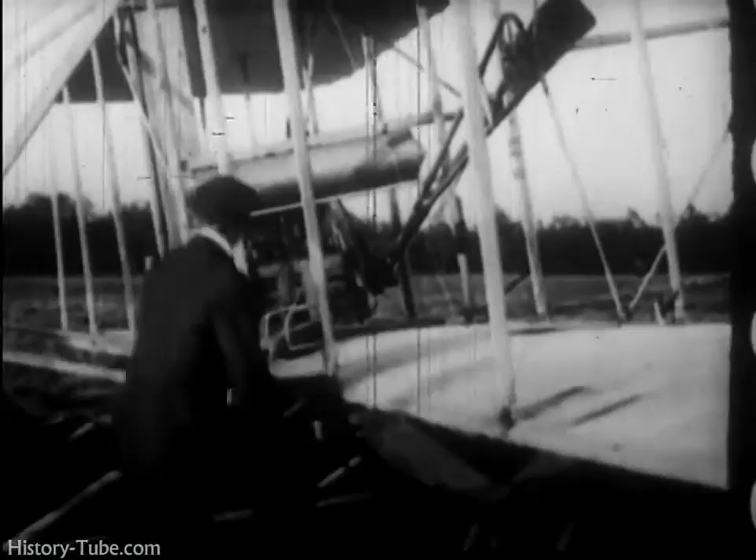time and space. But man is no longer earthbound, and Lockheed rides the airways with a thrust of bright propellers and the flash of gleaming wings. And behind this Lockheed lies aviation history. In 1903, on the plains of Kitty Hawk, North Carolina, this history began. In the granddaddy of all modern planes, the Wright brothers won immortality by sustaining flight in a heavier-than-air flying machine.

There is no fuss or ceremony, no cheering crowds. The motors sputter and catch, weights drop, the ship catapults off the ground into the air for the first flight on record. Since then, aviation history is written in a never-fading book of records. In 1928, a Lockheed Vega, the well-known Yankee Doodle, reaches New York from Los Angeles in 18 hours and 58 minutes. At the controls are Colonel Arthur Goebel and Harry Tucker.

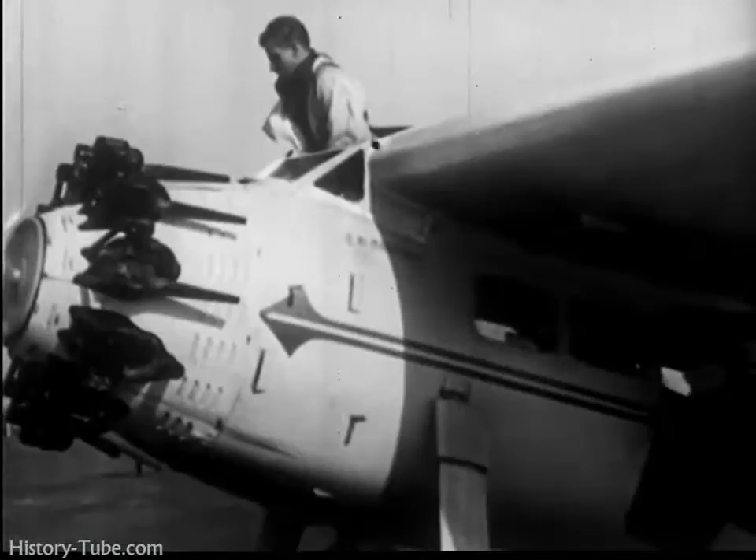In 1929, Captain Frank Hawks climbs aboard his Lockheed to set a new transcontinental mark. Good luck, Captain. New York is only 3,000 miles away. Off on his way to a new record, one of the many he is to establish in the years that follow.

Into the cockpit of his Lockheed Sirius climbs Colonel Charles Lindbergh. Mrs. Lindbergh is with him. Flying together, as always, they are heading from Washington, D.C., across the Bering Sea to Japan. A perfect landing after almost half the world has rolled by beneath their wings. Cheers and waving flags as Tokyo greets them.

That same year, 1931, Ruth Nichols lands her Lockheed Vega after establishing a new feminine altitude record of 28,743 feet. Nice going, Miss Nichols. 1933, a famous Lockheed, the Winnie Mae, carrying a famous flyer, comes home from a solo flight around the world. What an achievement for Wiley Post. First man to fly around the world alone, and first to fly around the world twice, both times in a Lockheed.

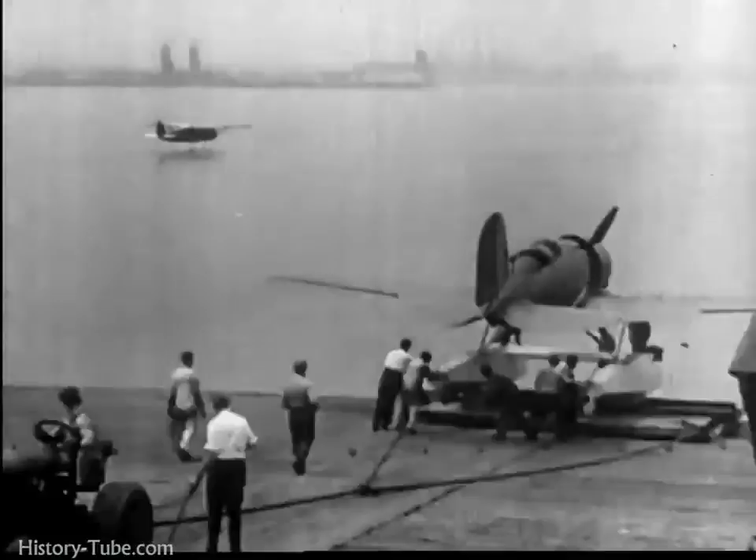Colonel and Mrs. Lindbergh are starting on another and perhaps their greatest journey. A 29,000-mile survey flight from New York to Labrador, Greenland, Iceland, Europe, the Azores, Africa, Brazil, and return to New York.

1934 finds Sir Charles Kingsford Smith, together with Captain P.G. Taylor, completing a 7,000-mile trip from Australia to Oakland, California. It is the first crossing of the Pacific from west to east, and Sir Charles, in his Lockheed Altair, the Lady Southern Cross, has made it in less than 55 hours. This great flyer and great plane certainly deserve congratulations.

In 1935, Amelia Earhart flies her Lockheed from Honolulu to Oakland. She is the first woman to make a solo flight over the Pacific, covering the distance in 18 hours, 16 minutes. The crowd hails her for an outstanding performance.

1938, Howard Hughes hurries to his plane for the start of his race around the world. 3 days, 19 hours, and 9 minutes later, his Lockheed brings him back to New York and a new record. In less than 4 days, he saw 5 sunrises, and the plane actually beat the revolution of the Earth on its axis. Records and more records. And these are just part of a long list.

But exciting as they are, they mean nothing to the true goal of aviation unless the experience gained is applied to further the speed, safety, and all-round performance of air transportation. And with the cooperation of the pilots who made these famous flights, Lockheed has been able to achieve that performance and create new standards of efficiency.

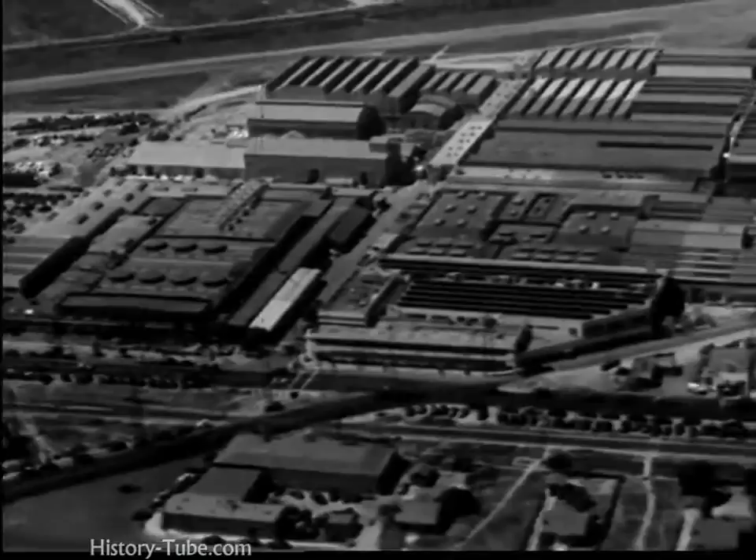Worldwide coverage, but it has not been accomplished in a day. It is the result of a smooth-running combination of men and machines. In that combination lies the story of Lockheed itself. It is a success story, modern, exciting, typically American. The Lockheed Aircraft Corporation plant, Burbank, California, in 1926. And today, the same company, the same location, but quite definitely not the same plant.

As recently as 1932, sales aggregated the overwhelming total of $23,298.03. In 1940, actual deliveries amounted to more than $42 million, and conservative estimates indicate that in 1941, this figure will be more than doubled. And to the men of Lockheed belongs a large share of the credit, to their skill and to their loyalty. They are a cross-section of typical American workmen: drillers, riveters, tool makers, die casters, machinists, and technicians.

In 1931, there were only 300 of them. 1941, over 35,000. Every man who checks in, from office boy on up, has taken and passed exhaustive tests covering intelligence, temperament, and special aptitude to prove his individual ability. 35,000 American workmen, the right men for the right jobs to build the best planes.

This is not a trick shot made with mirrors. It is the drafting room of the engineering department, where every new Lockheed has its beginning. A beginning conceived with the purpose of supplying the answer to definite needs of the aviation industry. To attain this goal, over 850 engineers make over 5,000 drawing plans, devoting a total of over 200,000 work hours to their mission of creating one new design.

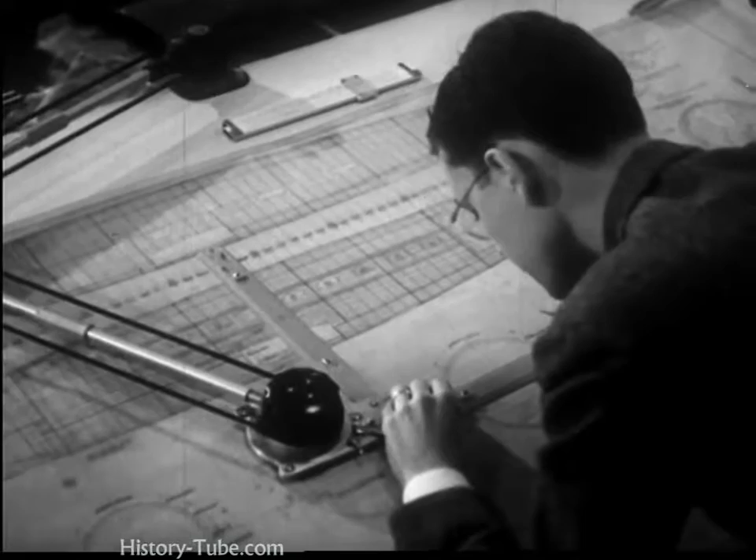The component parts of a modern airplane's wing, fuselage, and tail surface are almost countless in number, yet every single one of them must be engineered. Even the most minute part receives the greatest attention. Four separate drawings are made showing detail from four different angles. Although the part is no larger than a silver dollar, it will have to go a great deal further.

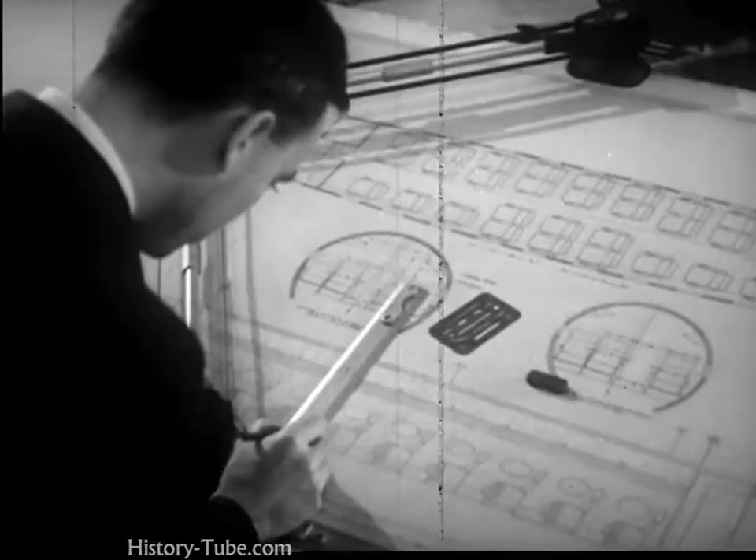The interior of a plane is one feature of design seldom associated in one's mind as coming under the supervision of the engineer. Yet one of his most important jobs is to provide utter comfort for passengers traveling through the air at high speeds. The Lodestar's cabin has been designed for this comfort. Inside, the sound of powerful motors is reduced to a pleasant hum by scientific soundproofing and vibration control.

Restful chairs, ample space, and headroom are results of thoughtful planning, and all Lockheeds are especially adaptable to the requirements of private owners. For businessmen to whom time means money, the Lodestar is convertible into a convenient and dependable office in the sky. The compact 12 becomes a comfortable lounge for attending important events anywhere at any time.

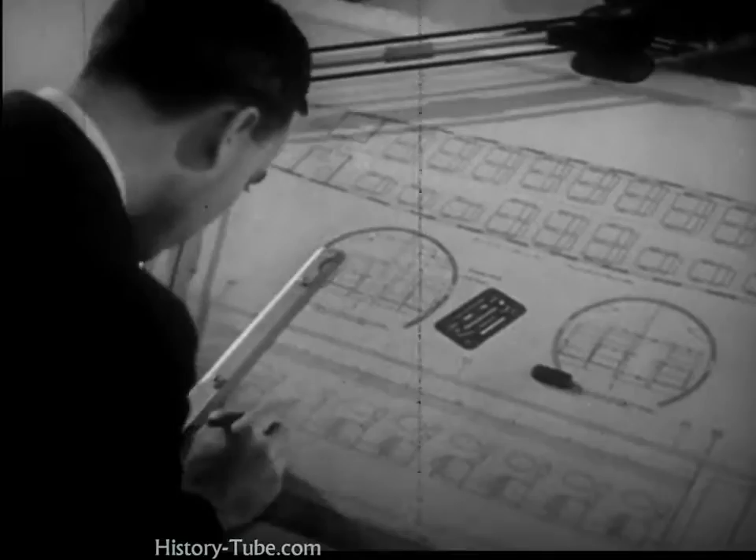The cabin of Lockheed's new four-motor transport, the Excalibur, will look very much like this. Although the plane is still under construction, the engineers have built an exact replica, known as a mock-up, out of wood. In this way, every possible detail of passenger comfort can be effectively predetermined and applied. But the ideas and plans that this man and the hundreds like him put into execution are not only those of Lockheed's chief engineers, but those of the entire flying world.

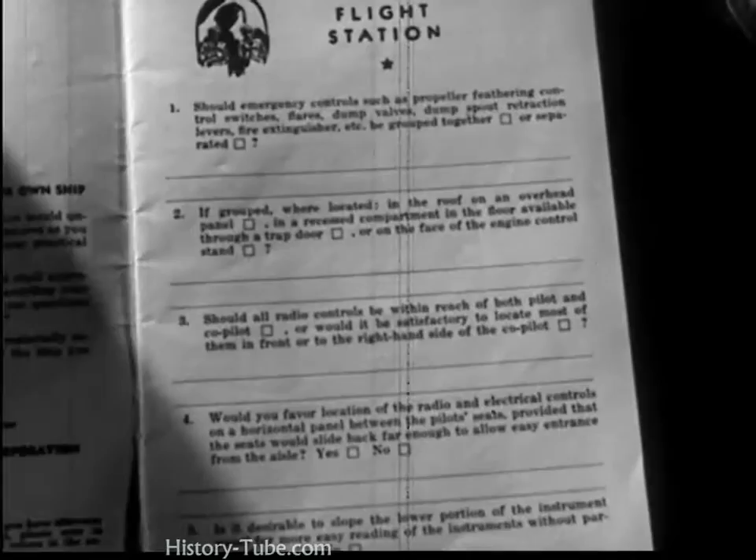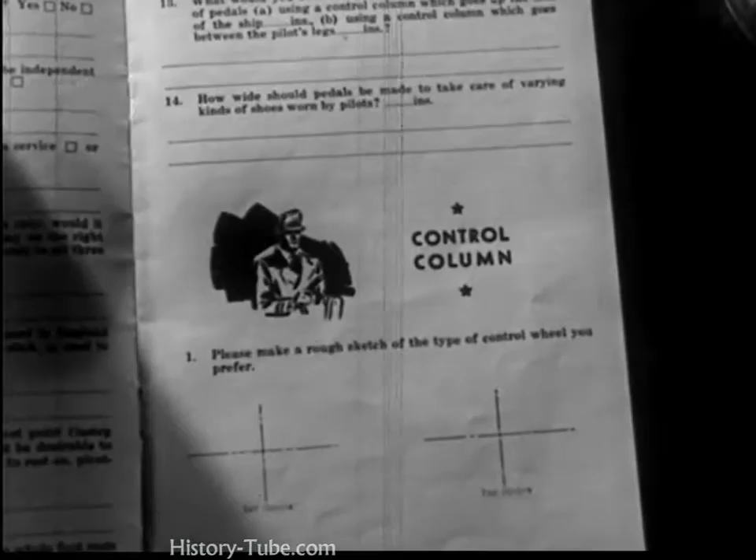For the Market Research Division maintains close contact with the operative branch of the industry. The staff compiles lists of important features relating to a plane's design. These findings are set up in the form of questionnaires. If you were to build your own ship, on the flight station, where would you locate emergency controls? On the engine control stand, where would you put the levers? And the rudder pedals?

These comprehensive questionnaires are sent to airline executives, pilots, transport officials in every corner of the world. To Trans-Canada Airlines, R.C. McLeod in South Africa, Tri-American Aviation, Buenos Aires. The list is almost endless, but to mention a few more, American Airlines, Lieutenant Thatch, VP-5 Squadron Canal Zone, and British Airways. The replies to these pamphlets are carefully sorted, for they represent knowledge gained under actual flight conditions.

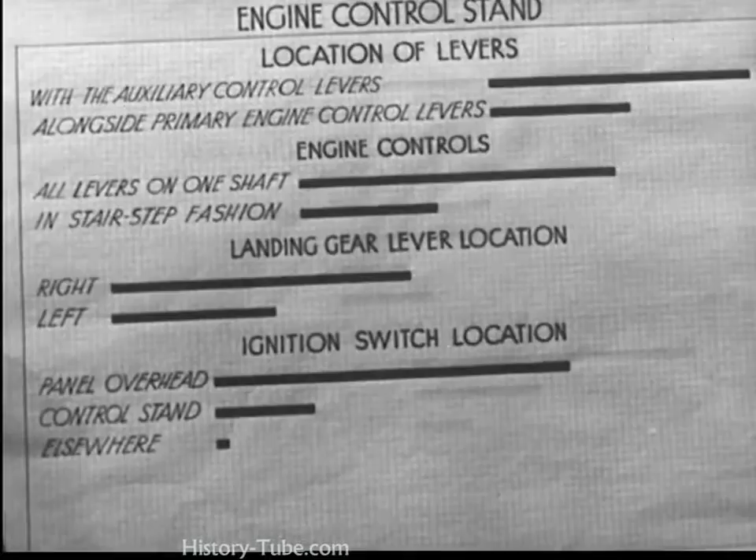Detailed graphs and charts are compiled by competent statisticians. No suggestion is too small. Every answer to every question is checked and noted. These findings are recorded in another pamphlet. You told us this is the way you would do it. On flight station, on engine control stand. And on rudder pedals, we asked, are brake toe pedals desirable? 93% said yes, 7% no.

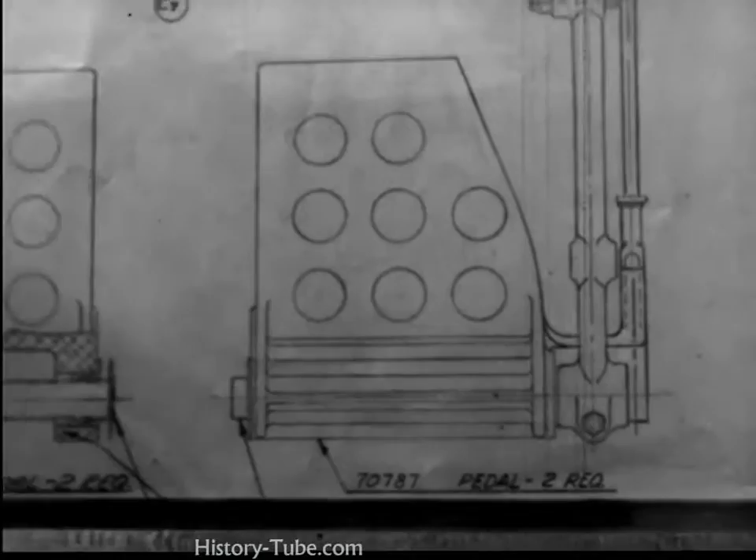That verdict is submitted by men whose combined opinions represent the experience of over 16 million hours of flying. These practical viewpoints, as gathered by market research, are submitted to the engineers. They combine these ideas together with their own creative ability in the conception and building of every new Lockheed plane. That's how Lockheed designs airplanes to suit the men who know airplanes best: operators, pilots, and regular airline passengers.

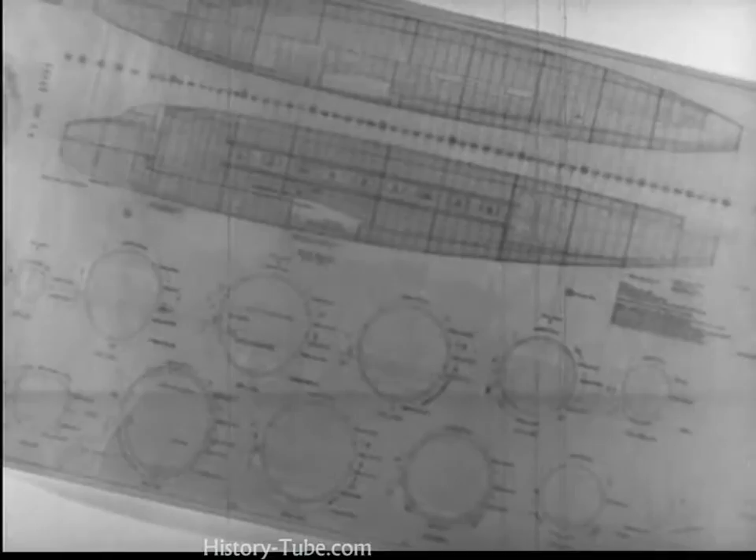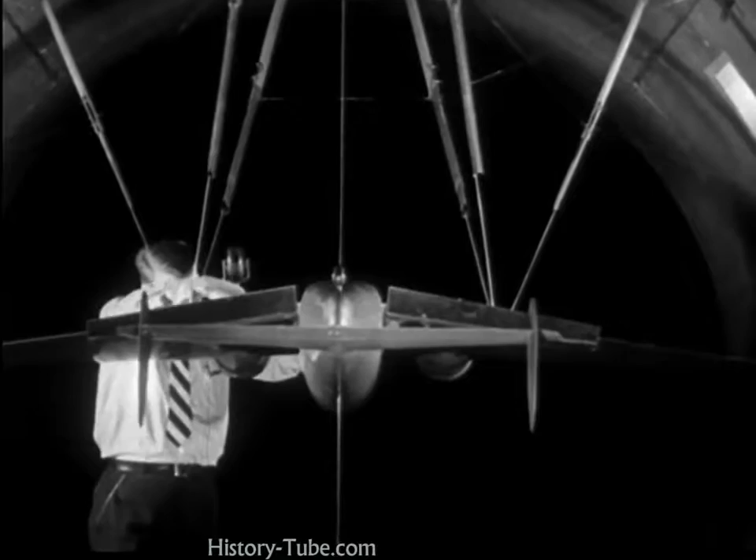And the first form a new plane takes is on paper. From these drawings and thousands like them, an exact scale model known as a wind tunnel model is made and is connected to instruments which determine its flight characteristics. The model is hand-carved, accurate to the fraction of an inch, weighs over 500 pounds, and costs more than $5,000 to build.

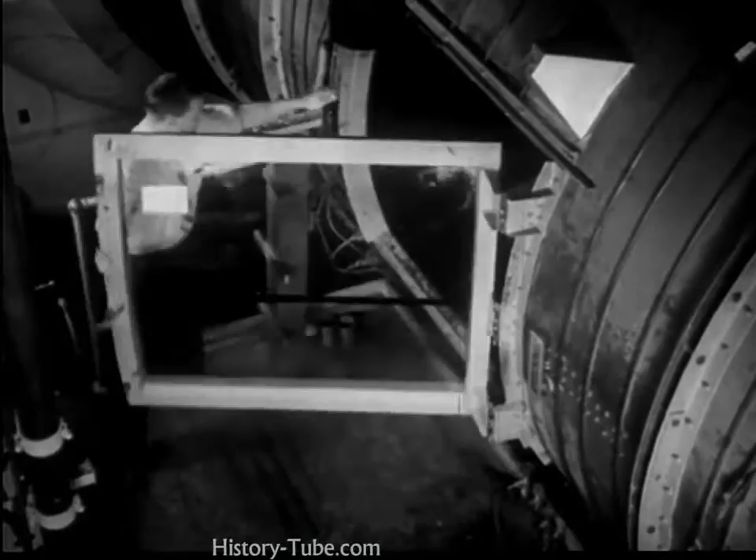The door is closed, the wind tunnel sealed. A flip of a switch and the wind propeller whips up to speed. The model is exposed to a far higher velocity than this 90-mile-an-hour wind. The small wind tunnel model is actually subjected to and withstands a much greater force.

From an idea to an actuality, from theory to fact, from a model to a completed Lockheed, the plane has been built. More than that, into it has been built the strength, ruggedness, and durability necessary for its safety and high-speed performance. But not so long ago, this shining plane was only a small part of a trainload of metal addressed to Lockheed.

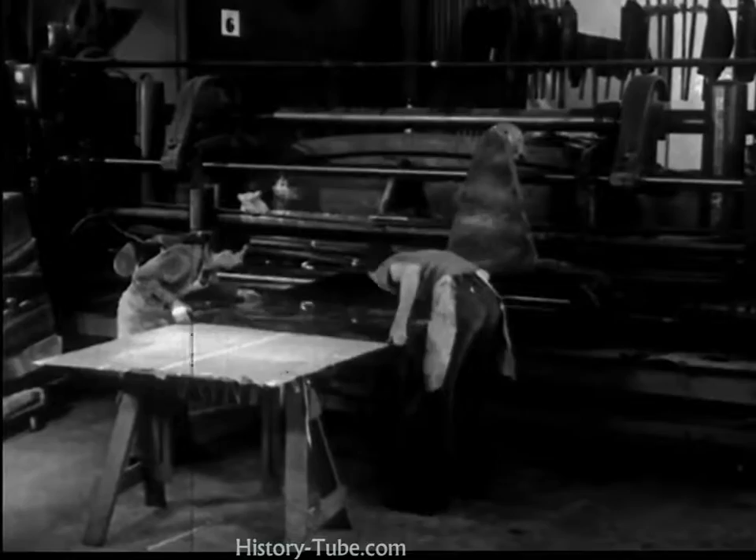For the metal inside these wooden frames is the stuff that planes are made of. Hard and strong, it must be fabricated by men and machines into the parts that make airliners. Giant shears act as huge mechanical scissors. Metal sheets are slipped into place. The sharp blade strikes and cuts through them as if they were cloth.

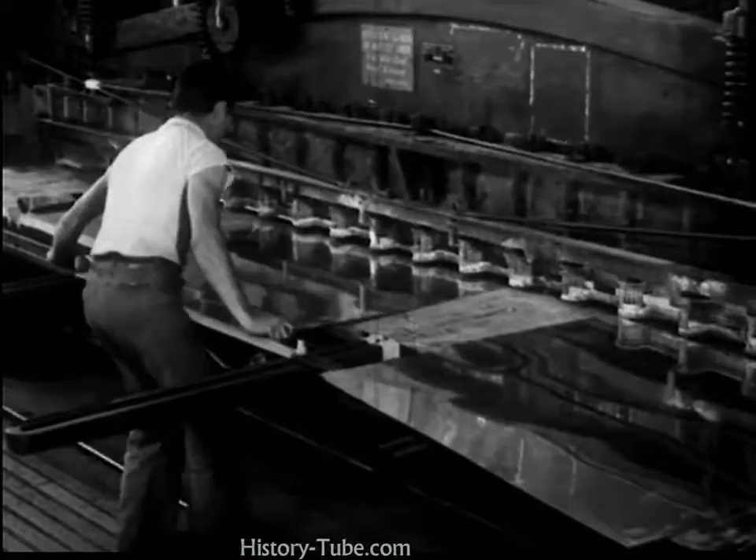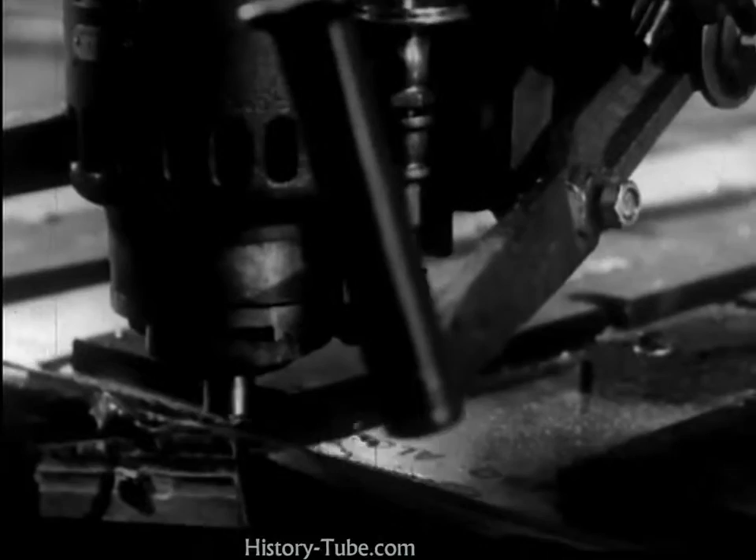The high-frequency router, a dental patient's nightmare, turns 15,000 revolutions a minute and cuts layers of metal into their first rough shape. The bit turns so fast that it must be cooled by a constant stream of oil.

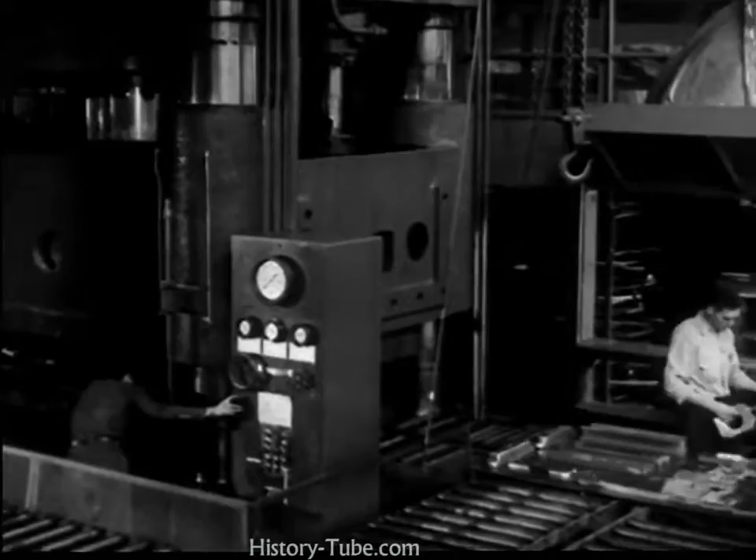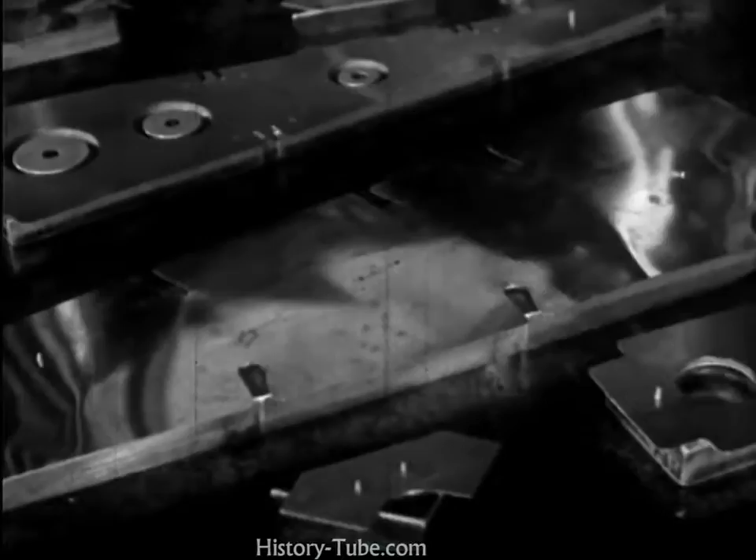The massive hydro press exerts an overall pressure of 9 million pounds, and it literally squeezes parts out of metal. An endless chain of roller conveyors carries a tray with the forms to workmen. They put the metal which has already been cut to the correct size in place on the forms. The tray now continues on its way into position under the press.

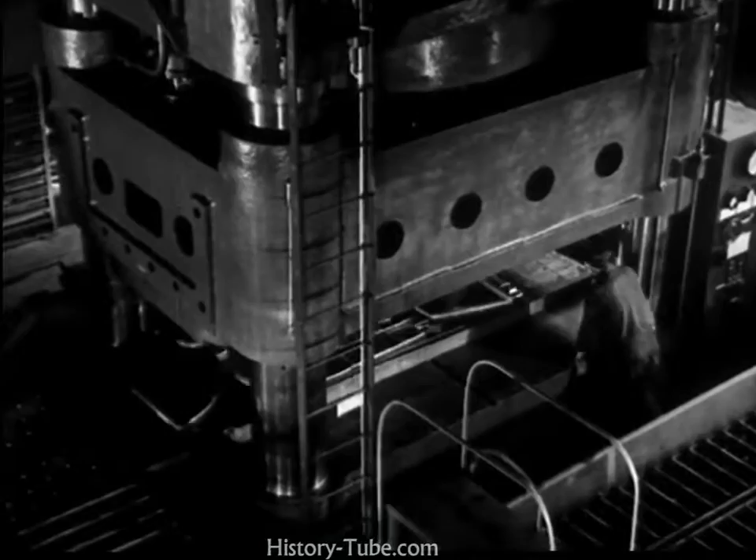The operator touches a switch, the press starts down, and look out below. Almost unbelievable pressure, an irresistible force, but under perfect control. And where plain sheet metal went in, finished parts come out. The hydro press turns out more parts in 1 minute than 2 men could complete in a whole day, and turns them out better and more accurately.

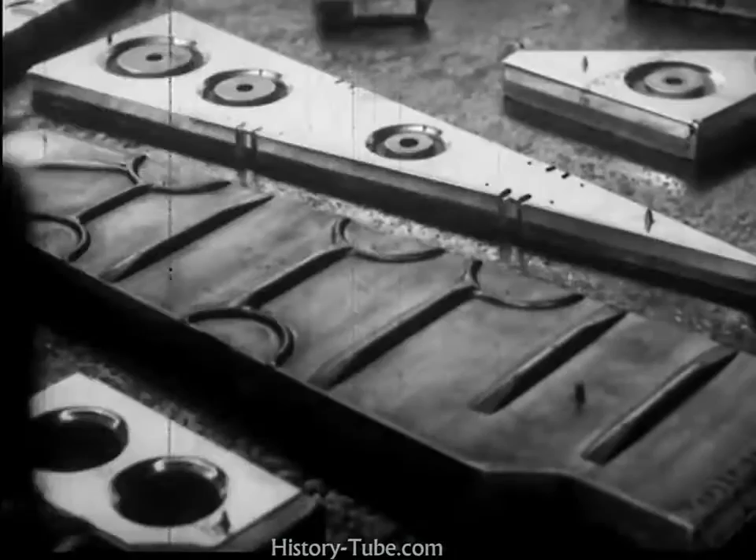A compressed air stamp which forges metal is an excellent example of powerful machinery under absolute control. Taps as gentle as a tack hammer, then the crushing impact. What a nutcracker this outfit would make. And yet its control is so delicate that it can crack an egg, at least so the operator claims.

Look out there, a little too hard and you'll have an awful mess. Be careful. Well, hello, stranger. You certainly have a brand new kind of a mama.

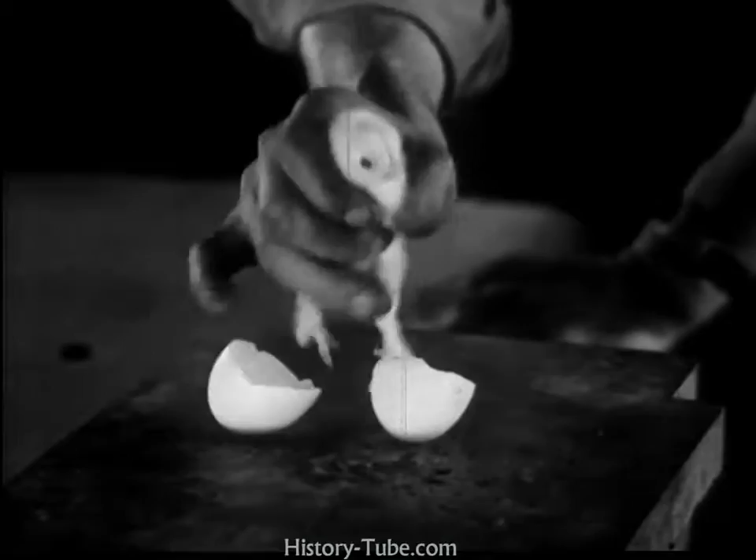Skilled men and precision machines have fabricated these parts, but even metal can be strengthened and protected. To do this, there are several types of processing. Complete electrochemical anodizing baths provide parts with a protective coating of oxide film. This is a safeguard against the threat of corrosion caused by moisture. It is an interesting fact that these parts are protected against any harmful effects of moisture by being given a bath.

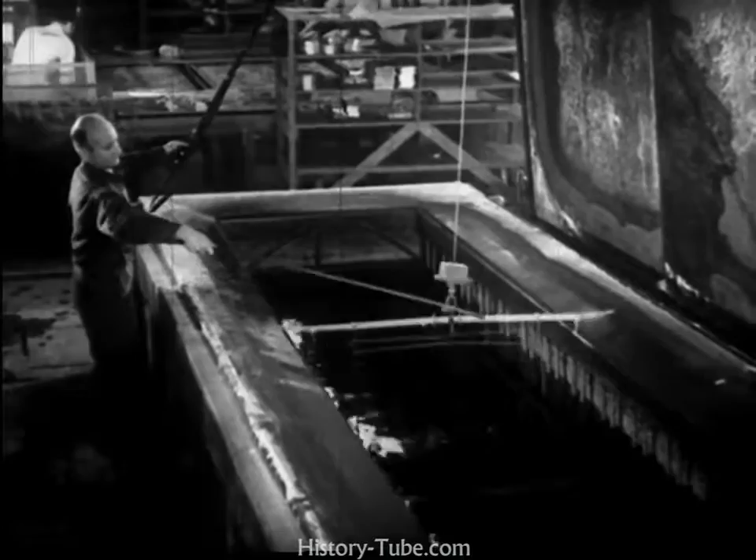Another type of bath is used for a different purpose. In order to harden and thereby strengthen certain parts, they are immersed in a hot salt solution of sodium potassium nitrate. In large ovens, other parts are hardened by baking at 1550 degrees Fahrenheit and quenching them in oil.

It is easy enough to say that these parts, which will eventually be the plane, are strong. To prove that they are, to constantly guard the Lockheed measure of strength is the duty of the testing laboratory. A spectrograph is one of the most modern scientific testing devices. It analyzes the purity of the metal alloys which go into a plane. Tremendous heat created by an arc burns sample filings of the metal. These filings are placed in a cavity on the lower of 2 acid-treated graphite electrodes and then burned.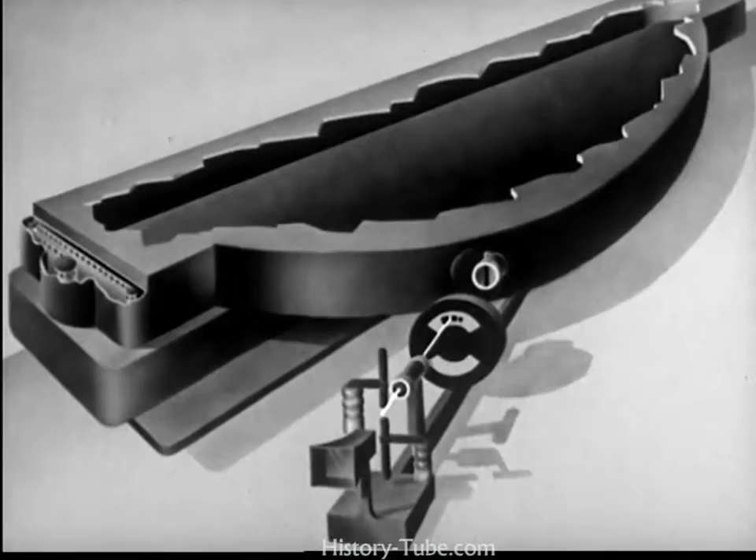The light of the burning metal passes through a lens and then through a rotating sector, the adjustable opening of which controls the amount of light falling on the slit. The light now passes through the slit and falls upon a diffraction grating. This diffraction grating is a concave aluminized glass plate on which 24,000 lines per inch have been ruled with a diamond point. The light is separated by the grating into wavelengths.

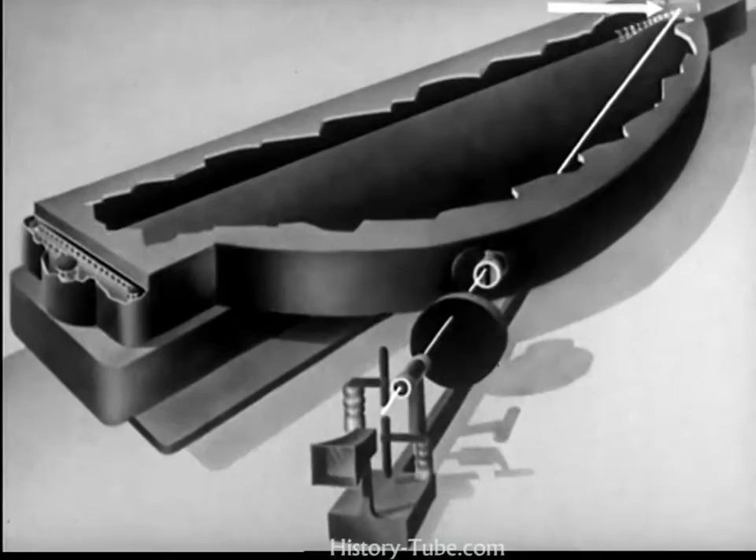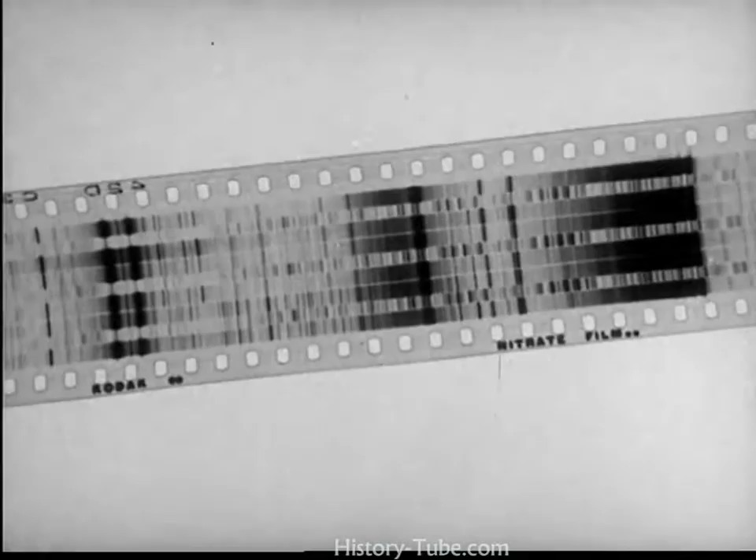These wavelengths, or light rays, fall upon a strip of film, and a photographic record of them is thus produced. Since each element has its own wavelength, from the developed film it is possible to determine exactly which are present in the alloy. In this manner, the spectrograph immediately detects all impurities, and any inferior metal is promptly discarded.

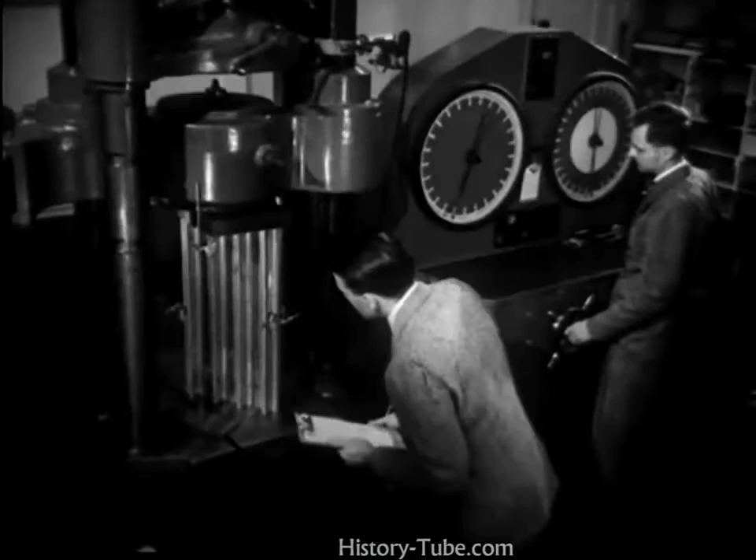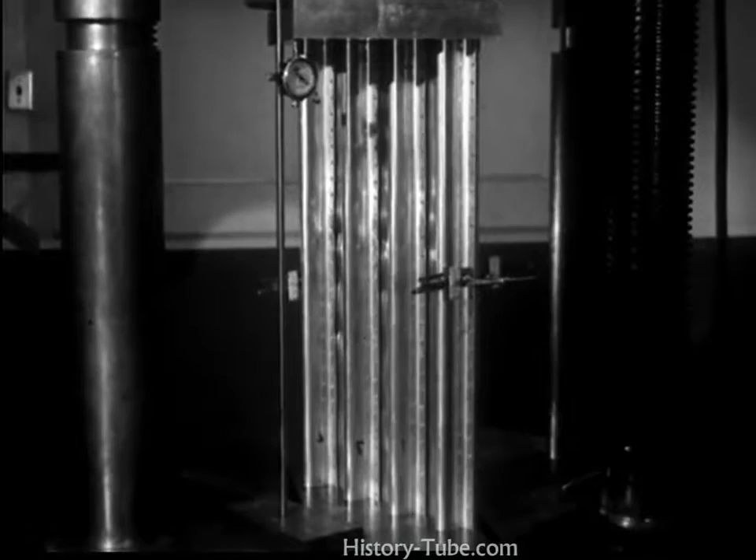The sole purpose of this huge machine is to break things. Its powerful jaws, capable of a compression of 300,000 pounds, are about to crush a small section of the wing in order to measure its resistance. Now watch carefully. The upper jaw is clamping down with an invisible, relentless force on the seemingly frail strip of metal. But actually, just how frail is it?

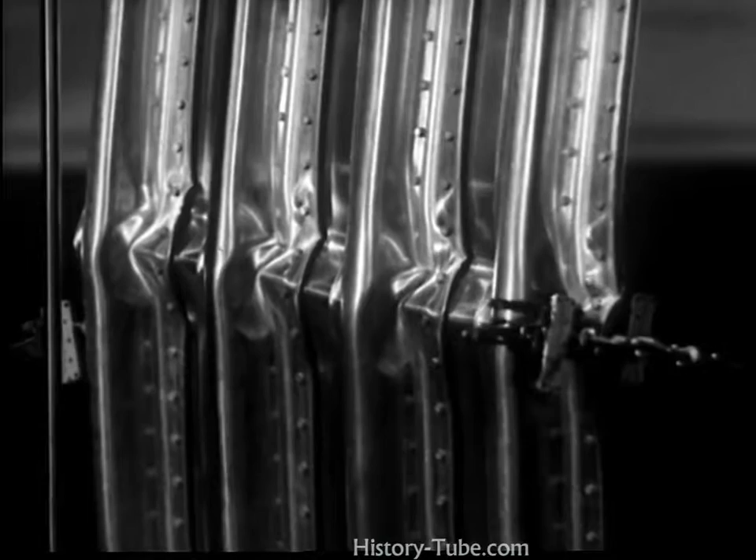60,000 pounds? 70,000? There it is, a slight ripple. The breaking point has been reached, and it takes a pressure of over 80,000 pounds to even bend this frail little section of a wing. For contrast, let's see what happens to a solid cylinder of concrete, which certainly appears much stronger. There's the first crack, and the concrete shatters completely under a pressure of less than 75,000 pounds.

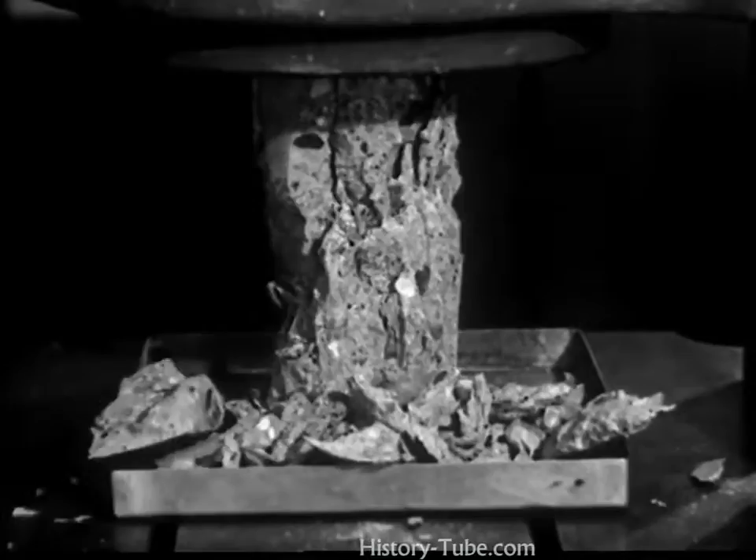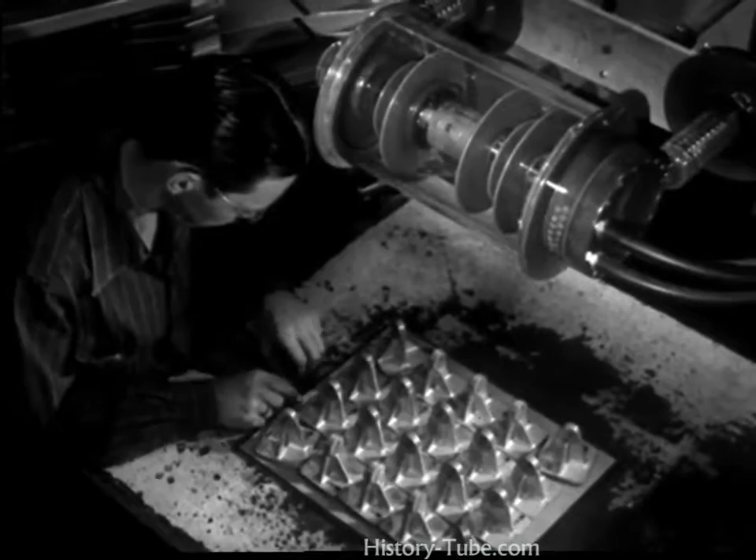All stressed parts, such as forgings and castings, are X-rayed for any possible flaws in the metal. Lockheed X-rays more parts than all other aircraft manufacturers combined. They may look new and shiny on the surface, but that doesn't matter. What are they like underneath?

This batch is fine, perfect. A different story here. Those slight, almost imperceptible flaws which doom it to the scrap heap would be invisible to any eye other than the X-ray. Therefore, although it is important to know what is on the outside of a plane, every stressed part is X-rayed because Lockheed thinks it is even more important to be absolutely positive of what is on the inside.

Yes, every part of this plane is built for the strength, ruggedness, and durability to achieve the highest speeds. And there goes the Lodestar. Carrying a full load of 17,500 pounds, it speeds down the runway for the takeoff. In 15 seconds, after a run of only 860 feet, it leaves the ground and soars into the air, climbing rate 1,200 feet per minute.

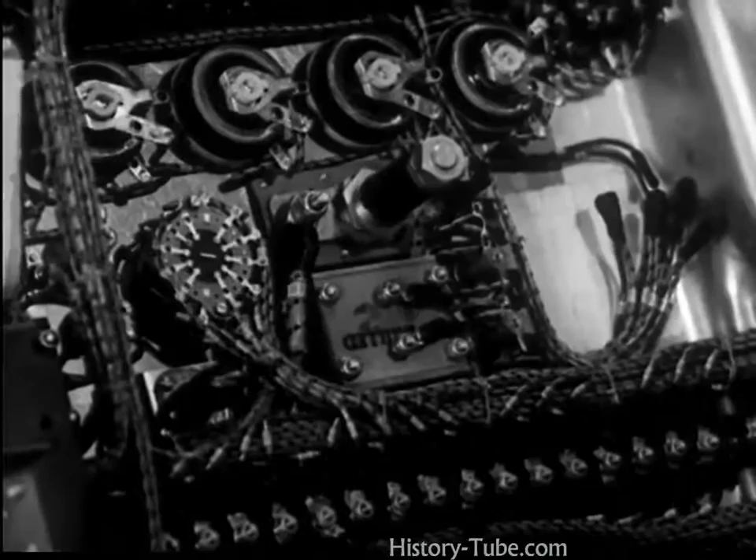And while the plane is in flight, the dials and indicators on the panel are the guides by which a pilot flies. Over a half a mile of wire connects them with the controlling instruments, which must be infinitely accurate before they are installed. In the instrument testing laboratory, each instrument and accessory is, to all intents and purposes, actually flown before being installed on the plane itself.

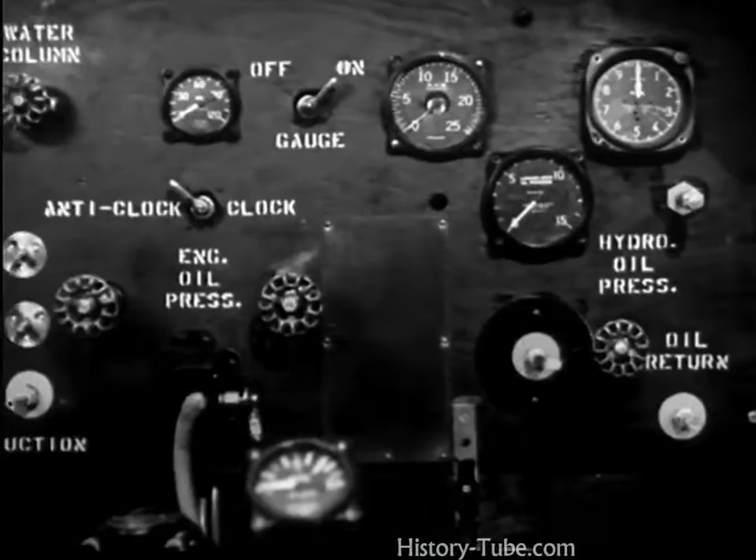For instance, on this stand, a motor duplicates the swing of a plane to test the turn and bank indicators. Here, tachometers are also tested, and propeller governors, vacuum pumps, fuel pumps, starters, generators, and hydromatic motors for feathering propellers. The automatic pilot is checked by a vacuum system against mercury manometers. This small box can guide a plane in flight, keep it as true to its course as the most experienced pilot.

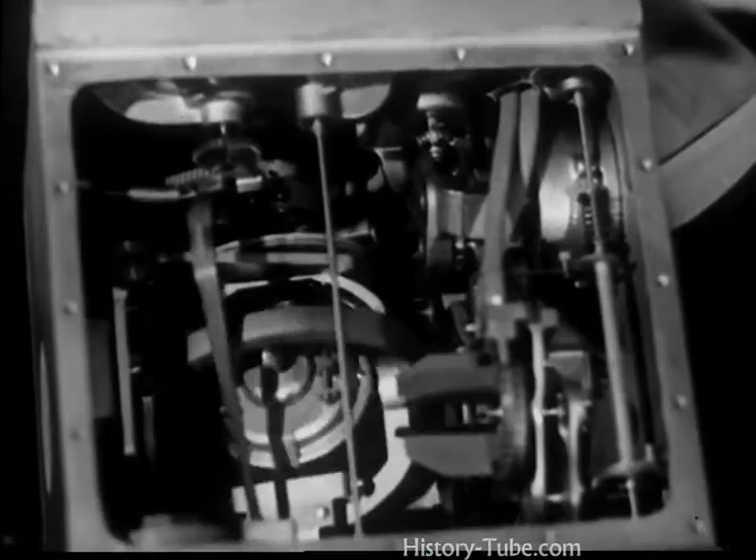An airplane is a chain of which the thousands of separate parts are the links. They must be forged together in order to shape the wing, the tail, and the fuselage. The duty of the wing is to provide the lift that sustains the flight of an airplane. Here in the plant, it must be assembled as flawlessly as it was designed.

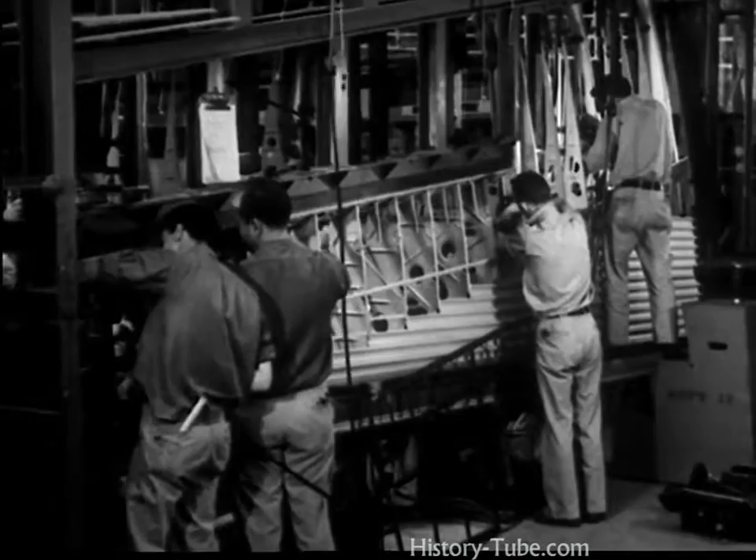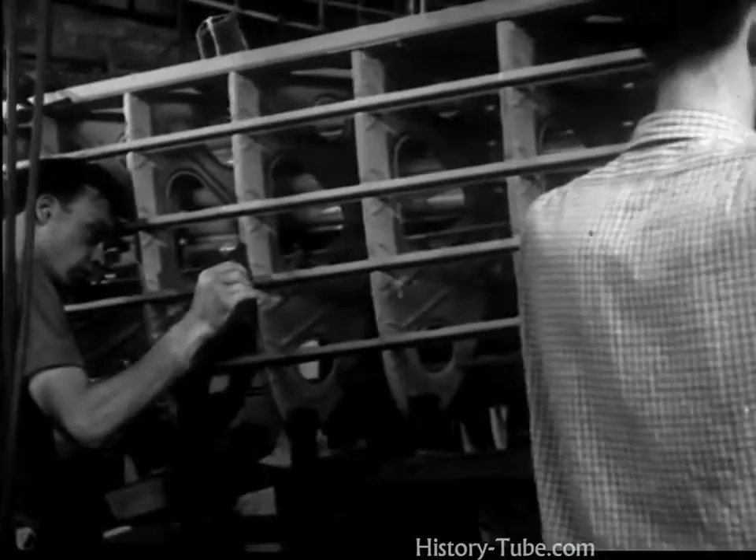Although a wing is generally considered as a unit, it is really composed of 3 parts, 2 outer sections and the center section. We are all familiar with the general shape of a wing, but while an outer section is in the first stages of assembly, we can get a good idea of the complex structure on the inside. Every rib and crosspiece has its purpose. Remember, it was just a small part of the wing that we saw withstand a compression of 80,000 pounds.

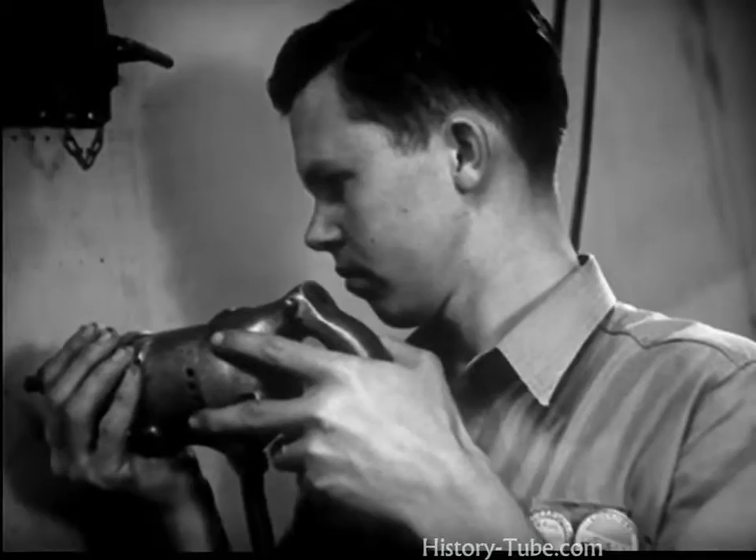Each operation is executed with precision and care as the outer section moves down the production line and takes shape. High-speed electric drills punch holes for the rivets. There are more than 700 drillers or riveters who have all had previous training. Even so, before they're assigned to actual production, they must attend Lockheed's own school until they can uphold the plant's standard of efficiency and skill.

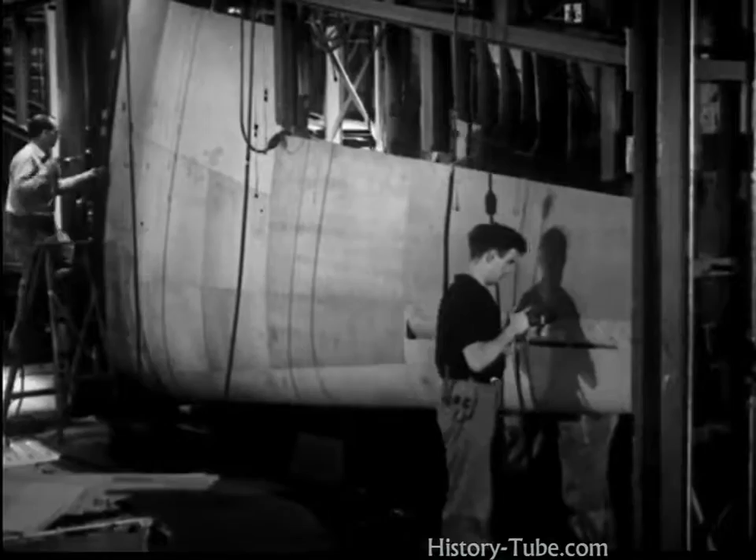There are more than 50,000 rivets on a completed wing, and every one of them is checked, examined, and checked again. This requires an army of over 200 inspectors, such as this one. But by the time a Lockheed plane is assembled, every square inch of it has been inspected at least 5 times. Inspector number 158 finds this row perfect and okays it.

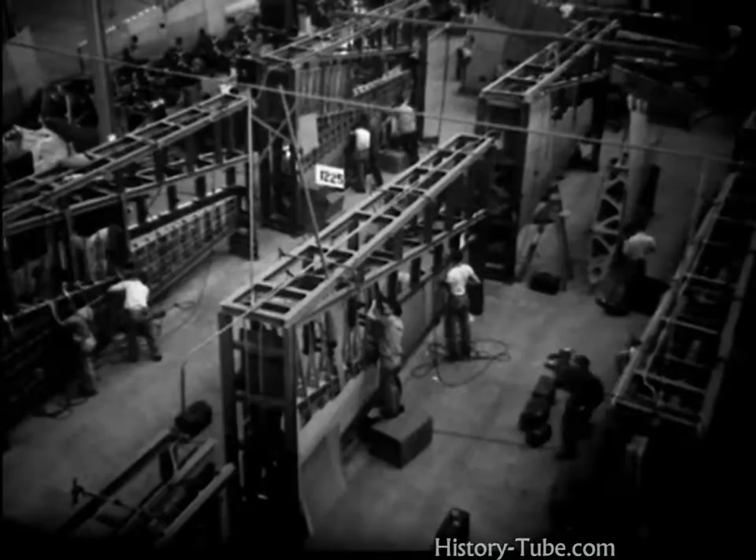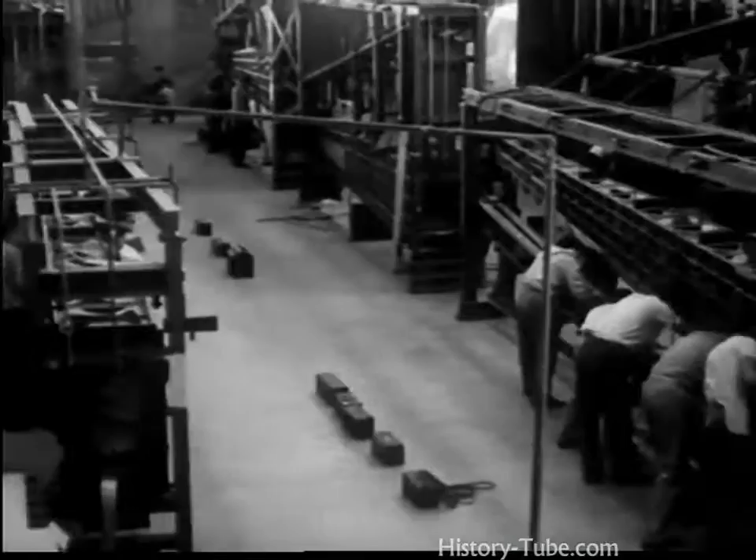And the story of one outer wing section is the story of 10, of 20, of 1,000 sections as they move down the line in an endless parade. Mass production with the emphasis on precision and quality. The assembly line for the center section of the wing is one of the largest and most vital units in the plant. It has to be because the center section is the strong man of the plane.

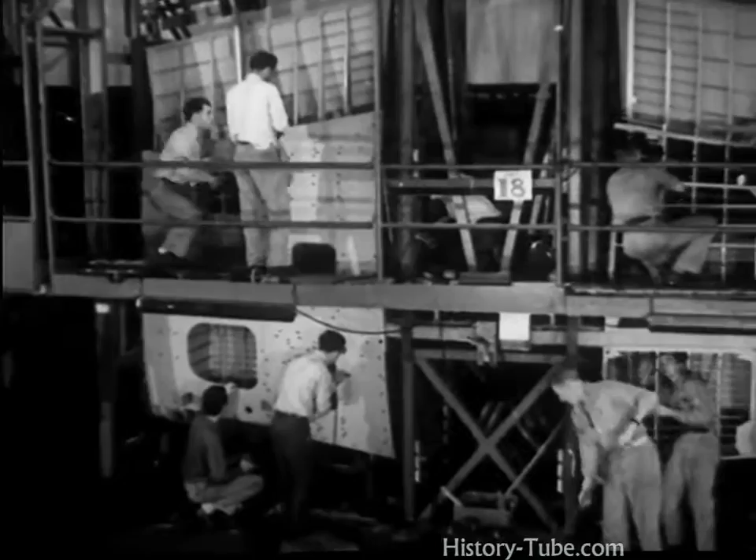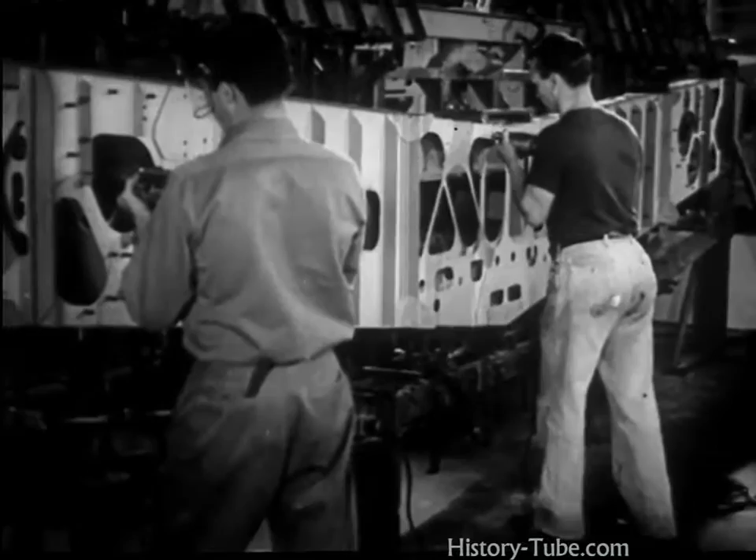It must be constructed and assembled so as to be able to support heavy loads and to withstand great strain, for it unites the 2 outer wings with the fuselage. The fuselage will eventually rest in the gap between the 2 shoulders, and the wings will be joined like arms on either side. The main beam of the center section is the strongest part, the backbone of the entire plane. Like a bridge, it must carry any burden with steadfast dependability.

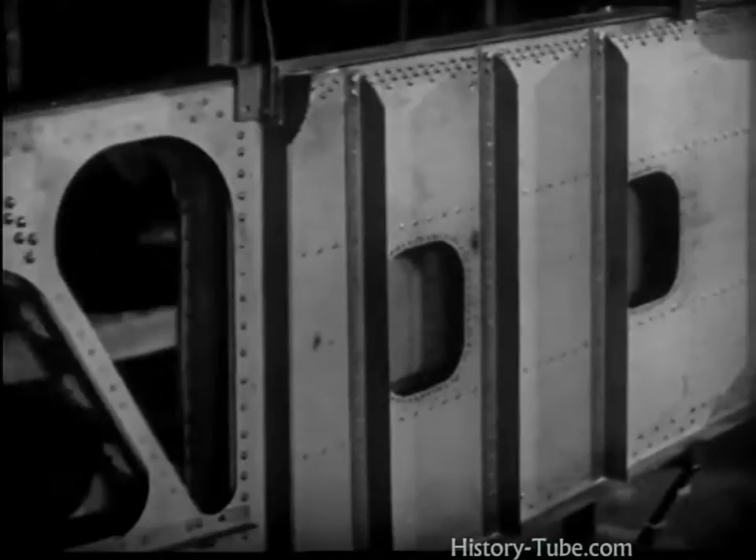And the main beam is built just like a bridge. At all times, it carries all of the flying load, the engine load, and the landing load. And it is stressed to support more than 5 times the total weight of the fully loaded plane. Completed and assembled, capable of supporting a static load of 70,000 pounds, the wing will do its job as the men who built it have done theirs.

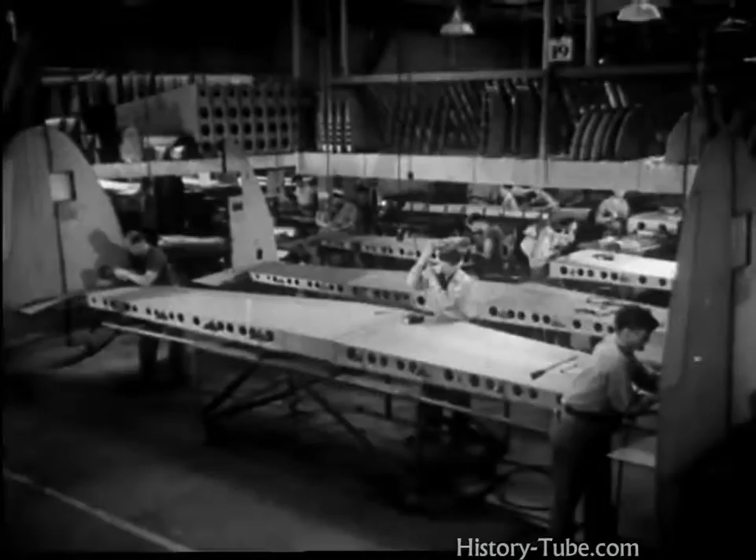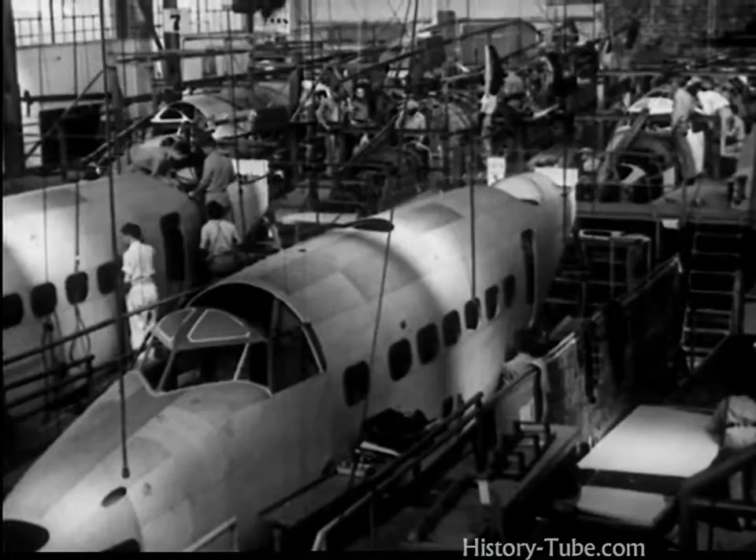The tail surfaces control the maneuverability of a plane. The use of twin rudders was developed by Lockheed and are one of the distinguishing features which point out every Lockheed. The fuselage is the body of the plane. It represents the final word in aerodynamic design and streamlining. And during construction, these basic principles are built into the fuselage and applied to every operation from the beginning to the completed shell.

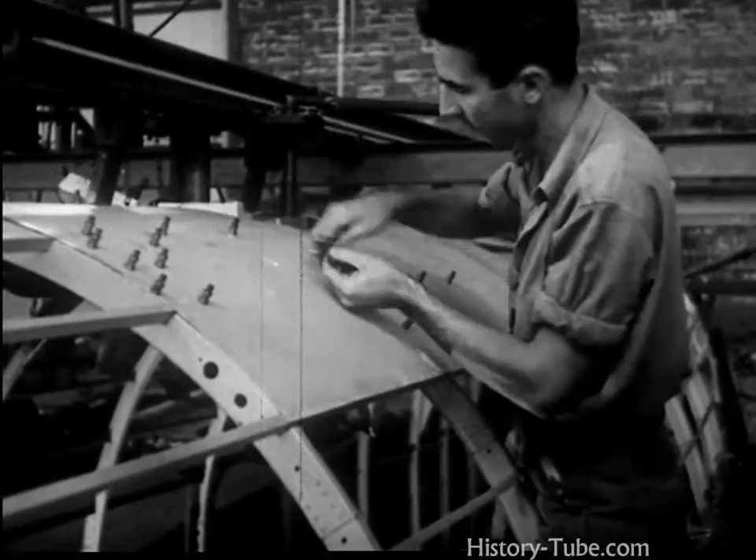As the first step in its assembly, the bulkheads are joined together by stringers, which form the basic shape and strength of the fuselage. Skin fitters then fit and shape the metal sheets, attaching them with removable fasteners. On their heels come the riveters, while every stage of the assembly is constantly under the close check of inspectors.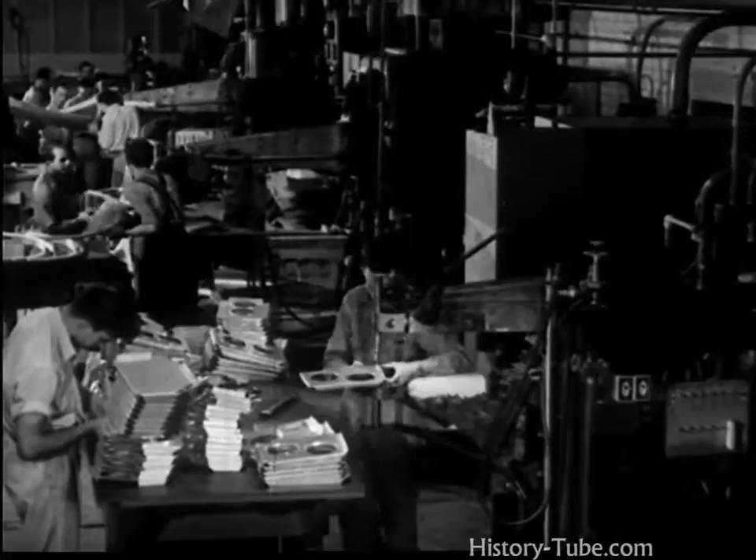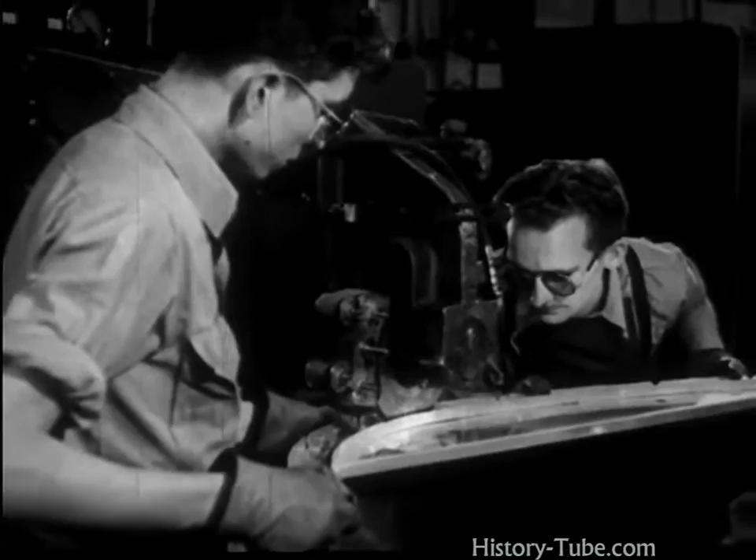Assembling with electric continuous spot welders facilitates production and gives many fuselage parts an extra smoothness for better streamlining. With an eye to the future, Lockheed is constantly enlarging on this process because better streamlining means greater speed. And so another fuselage is finished and ready for mating with the wing.

Like a ship being launched, it moves slowly down the ways. Slowly now, yes, but for just a little while longer. Soon sunlight will be glinting from its metal sides. Its nose will point upwind. In the comfort of its cabin, passengers will read or write or sleep or think after their own fashion, and beneath it, the lakes, rivers, and valleys of the countryside will unfold.

Slowly still, the fuselage is lowered into place, united with the wing, and now, slow no longer. Speed on the water. Speed on the snow. Speed on wheels. On rails. Speed on wings. There is truth in the slogan that it takes a Lockheed to beat a Lockheed.

And as the plane approaches the field, it slows down for the landing. The Fowler flap has been adopted and developed by Lockheed. The flap gives a greater lift to the wing and provides a brake action to reduce the speed. The plane lands at 65 miles an hour, and from a height of 50 feet, it can come to a complete stop in less than 600 yards.

This Lockheed Lodestar, with its safety, its comfort, and its great speed, typifies the ideals of aviation in America. To protect these ideals, Lockheed is contributing its share toward national defense and the defense of democracy in other parts of the world. These 414 bombers, better known as the Lockheed Hudson bombers, are rolling off the production line at an ever-increasing rate. They have been ordered in great quantities by Great Britain and Australia.

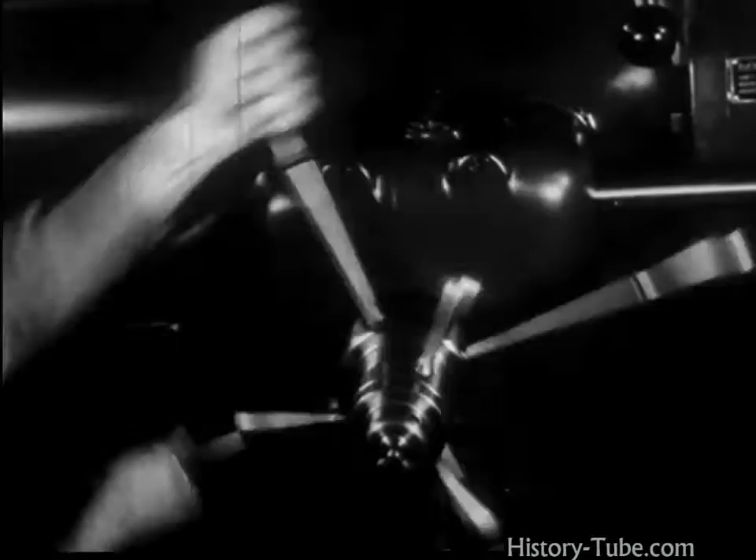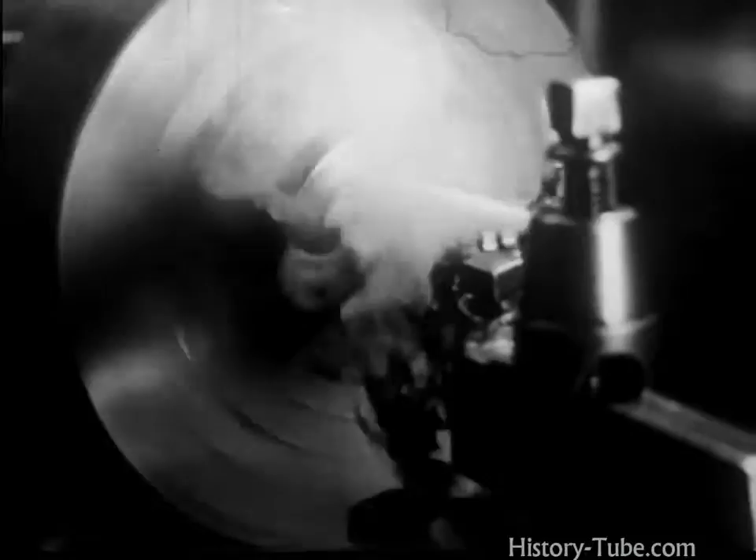And out of the vast production line come Lockheeds: the 212, the Electra, the 12, the Hudson bomber, the Lodestar, and now Lockheed's answer to the challenge of our times, the Interceptor Pursuit P-38. It has been developed solely for national defense, and Army officials consider it the fastest military plane in the world today. The P-38, a man-made comet.

The P-38 is a completely new development in conception and design. The purpose of this deadly single-seater fighter is to prevent any would-be attacker from reaching his objective. Lockheed is building vast quantities for the United States Army, and many of its features are closely guarded military secrets. But it can be revealed that the P-38 will climb a mile in a minute, and its motors are so quiet that it can approach any target almost without warning.

And as wings soar higher above America, so are soaring the hopes of free men the world over. For they know that whether it be for commerce or defense, ship for ship, American planes have no equal. And just as Lockheed commercial transports serve the people, so do the Lockheed military planes stand ready to serve should the need arise. The striking power of Hudson bombers, the speed of the P-38, envisioned by Lockheed, engineered by Lockheed, built by Lockheed.